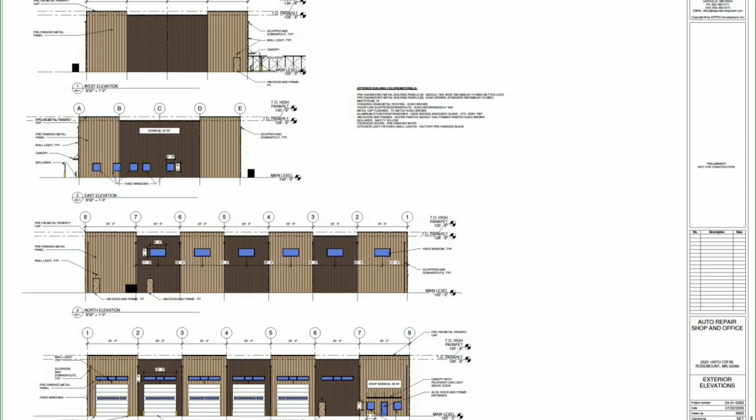So for site lighting, they provided a lighting plan containing pole-mounted lights at 25 feet tall and wall-mounted lights at 19 feet. The maximum height is 30 feet, so they're both good there. And the applicant's photometric study shows compliance with the code standard.

So there are two options in front of the Planning Commission tonight: an approval with conditions, or the option to continue the item to the Planning Commission meeting on August 25th. I believe the applicant is here and I can also answer questions.

Are there any questions from commissioners? I got one. So the entry, was it previously on the previous site plan, was the entry always not on the cul-de-sac area? Yeah, so I believe the previous plan had an entrance on this side up in the cul-de-sac, but just because they are only using these two sites, it's going to be on that shared driveway. Commissioner Biedner, were you asking about access into the site or an entrance into the building? Into the site, yep.

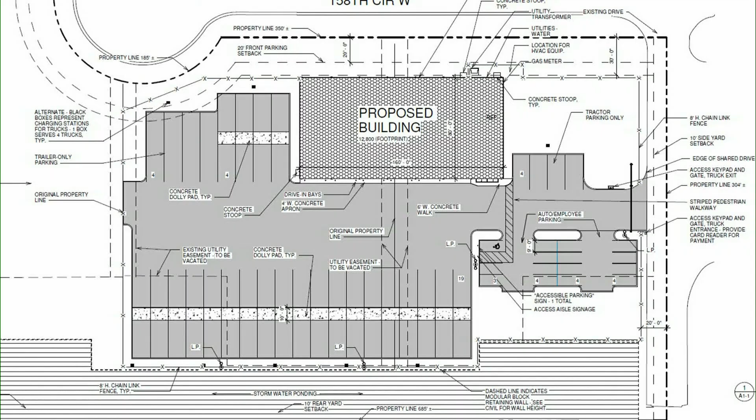Liz, a couple questions. Because I know one of the options here was to continue because there are some missing elements. The landscape plan was not complete. Was the exterior elevations, is that complete from your perspective? Since the standards were updated in the 2024 zoning code, we are including the condition of approval that 40% of the materials be made up of that approved list.

Okay, and then the trash enclosure, I can ask the applicant about that one, right? Because that hasn't been planned out yet. Correct. Okay. Are there any more questions from the commissioners?

Otherwise, all right, at this time then, we'll open up the public hearing. And if we can ask the applicant to come up first, that'd be great.

Hello, I'm Nadia Ritter with APPRO Development. We're representing Kamal and Mustafa's KCI group, who are the owners for this project.

So for the landscape plan, to get that question out of the way, we plan to add around the current parking areas for the time being, ideally where we can put them in a way that they won't have to be removed once we do the future expansion. So spots that would be a future island and kind of around the auto parking areas in that sense.

Can we bring up that layout that shows the current landscape plan? Thanks, Liz.

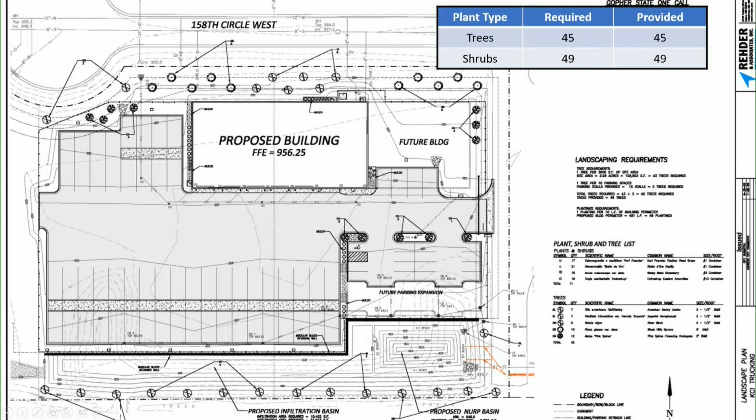Thank you. Yep, for the second one with the exterior elevations, all of the dark brown panels that we were showing, those will be changed to be an approved material from the list. That does meet the 40% at minimum. It gets to 41% on the most restrictive elevation. At most, it gets to be about 48%. So we would have that.

With that, we would like to request that we could go back to the initial exterior elevations that were submitted for this application that showed a gabled roof line. As it's currently shown with the metal panels, adding whether it's brick or stone, masonry of some form along those spots, it will create a weather challenge that could cause issues in the future for the metal building. I believe the previous application that was approved back in 2025 did also have that gabled roof. So we would just request that we could go back to that to include the 40% there, just to make sure there's no future issues for the owners with weather.

Now would the plan be to update those plans prior to the commission, I'm sorry, the council meeting for that approval? Yes, sir. Okay. Mr. Chair, so because this is a site plan, it is approved solely by the planning commission. Okay. All right, thank you.

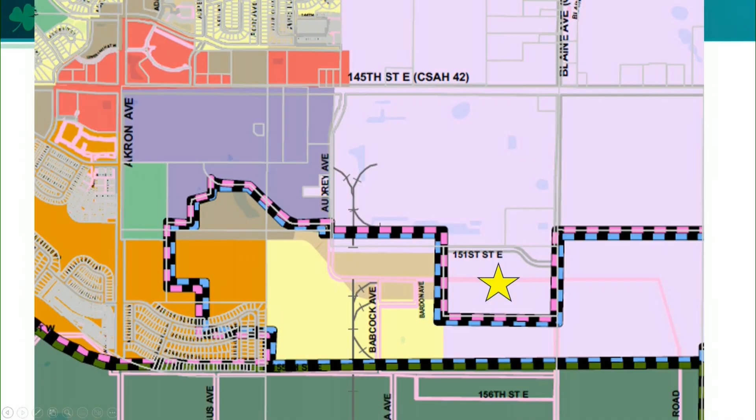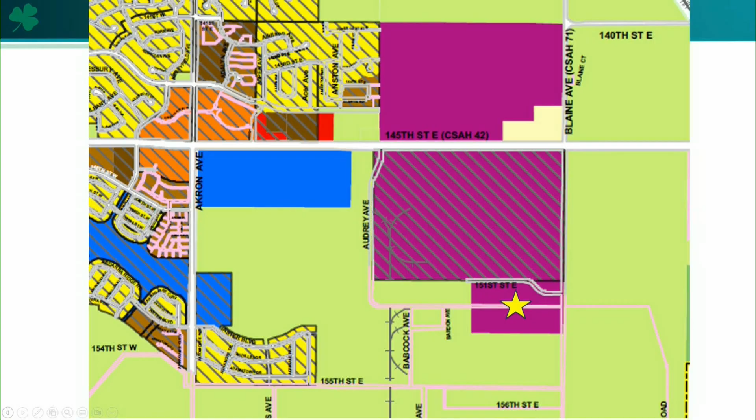There will be a new street constructed as part of this along the northern side of the project. You can see here the site's land use designation as business park, that lavender color there, and the site itself, its location is indicated with that star. Then the zoning for the site, B2 employment, that's that purplish color there. Again, the star indicating the site itself, and the general alignment of that future road on the north side there.

So this is the overall concept plan. This is what the applicant is envisioning for the full build out. Before the Planning Commission tonight is just the first phase, which is in this kind of northeastern portion of the site. I've got more detailed plans here going forward, but just want to give the Planning Commission an idea of what they can expect this project to be built out as.

So in addition to building 1 and 2, which are the principal testing facilities in there, there is accessory buildings and then mechanical buildings as well that support the work that goes on in those principal buildings 1 and 2. There's some mechanical equipment shown here on the south, as well as other accessory buildings.

These are all concepts. Ultimately, whatever does come forward in subsequent phases beyond phase 1 will come back to the Planning Commission for review through the site plan review process. Also note that Xcel Energy will be constructing a substation in the northeast portion of the site. That's similar to what the Meta site has over there, making use of those transmission lines that are being run down there. A separate site plan review for that essential service facility would be required prior to its construction.

Lastly, I want to note the engineering building in the central area. This would be a collaborative effort between the University of Minnesota and Northwind to allow for educational opportunities on that site as part of research and testing. The applicant is envisioning a campus-style development with buildings 1 and 2 and the engineering building sharing a similar architectural feel, with a complementary mix of materials and a central plaza area—what you would picture for a tech campus in that area.

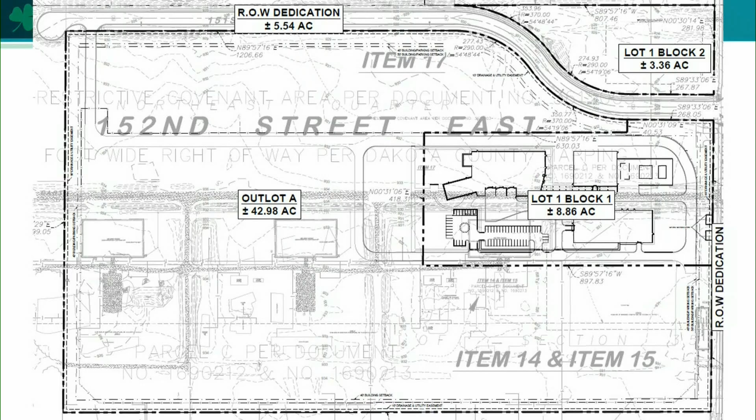So this is the preliminary plat, giving a general layout of the site showing the right-of-way as well as the lot areas. The actual plat itself shows the parcels that would be created: Lot 1, Block 1, and Lot 1, Block 2 are the 2 buildable lots. Outlot A would be reserved for future phases, and the boundaries of future parcels would be reviewed and approved through the platting process going forward. Again, 151st Street is shown there as future right-of-way.

So with regards to the Planned Unit Development Master Development Plan, I'll go through the requested deviations or flexibility from the code. In speaking with the applicant, they indicated that the second phase would be very similar to the first phase with regards to building height and materials.

They are requesting maximum building height of up to 120 feet, with occupiable building height not exceeding 75 feet. The 120 feet would be more for mechanical exhaust towers from the building, and I can certainly defer to the applicant on their specific requests for these.

For off-street parking requirements, the applicant is asking that parking be based on the actual employment and usage of the site due to the highly specialized nature of the development. I want to point out on this concept plan that the applicant is anticipating additional parking in some of these subsequent phases. Typically we require parking standards because someone might buy a building built with a certain level of parking, and then someone else comes in with a different use that has a much higher need for parking.

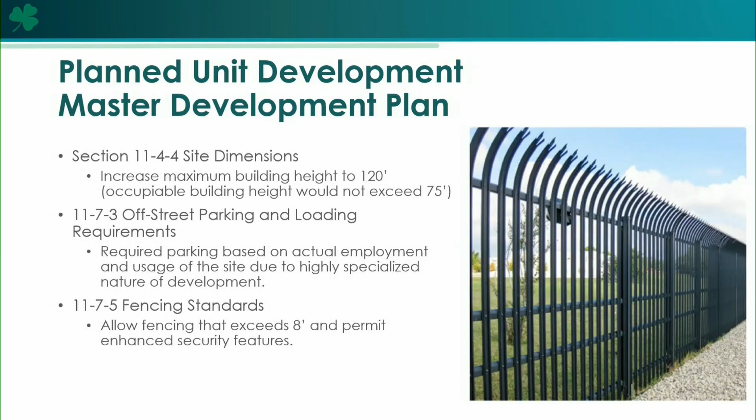The third item being asked for deviation from the code is regarding fencing standards. This is similar to what Meta had requested for security fencing, exceeding 8 feet with some enhanced security features. From an aesthetic or visual standpoint, from the right-of-way, the fencing would be located behind any screening trees, so impacts on adjacent properties are pretty minimal in that regard. Staff is supportive of that, understanding the unique security requirements of this project.

Landscaping, screening, and buffering standards. The applicant's plans show a significant use of coniferous trees that exceed 50%, which is what the code allows for screening. Staff is supportive of that. Any other trees in the boulevards along new 151st Street are deciduous. There's a mix of deciduous and ornamental trees throughout the site. It's just the heavy plantings along the perimeter result in a percentage of coniferous that exceeds that 50%.

The next item relates to lighting standards. The applicant has expressed concern that they may exceed 1 lumen at their property line. Staff would note that the maximum level of illumination is measured at adjacent property lines. So when there's a right-of-way separating two properties, it might be 1 or 1.2 lumens on the subject property line, but once you get past that right-of-way, it's down below that. Staff is supportive of the request and would work with the applicant to verify what that illumination level would actually be on the other side of the road. The lighting is located along the roadways and the property itself.

Architectural standards: flexibility in the massing and articulation requirements based on the shape of the building and materials used. Typically this is a requirement where if there's a length of wall greater than 100 feet, vertical elements are required to break up that wall, either different textures of tilt-up panels, different colors, things like that. The applicant's plans and the shapes of the buildings show materials being used that would create visual interest and break up the mass of the building. They're just pretty large structures. Again, the screening provided and required by the applicant minimizes any impacts that a deviation from that standard would create. So staff is supportive of that as well.

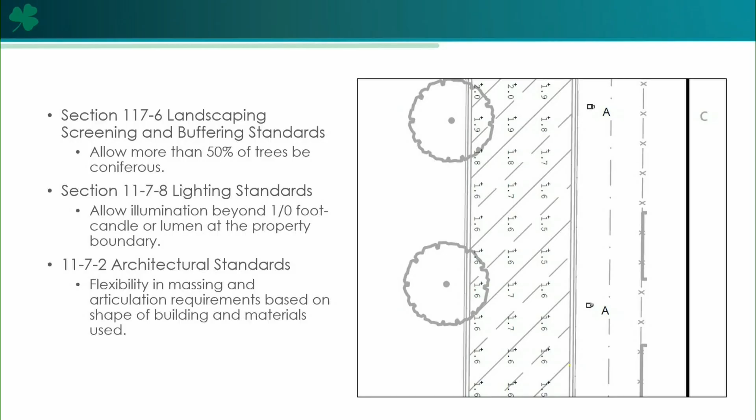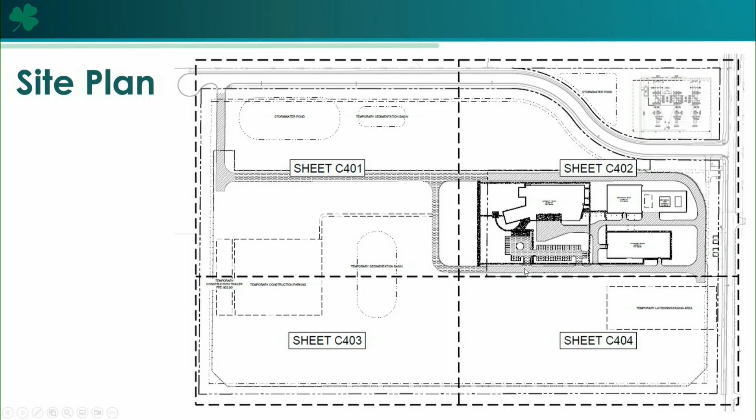Zooming in a little bit here, you can see there are 3 primary structures shown in this first phase. Building 1, where the wind tunnel is located, also has office and support space in there. A mechanical building supports the work that happens in this principal structure. There's a mechanical yard here, fully screened by walls that match the mechanical building. And then an accessory building that also supports the work going on there. They are connected by overhead piping connecting these buildings as well.

Parking for the site would be in this southwest portion here, and this is how employees would be entering the building. I have detailed architectural plans as well as 3D renderings of that primary building as well.

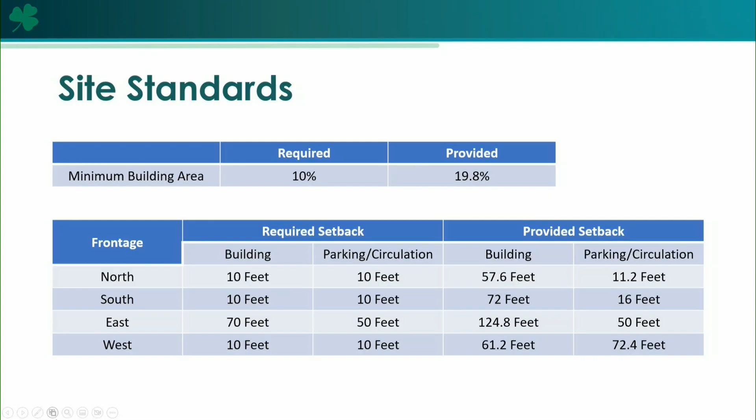The parking - the applicant did provide an expectation of what would be needed on the site. They anticipate 40 spaces needed, and they're showing 55 spaces there. Again, it's not likely that the user of the site would ever change, or the use itself would ever change. There is additional land for additional parking if needed that the applicant could make use of.

With regards to the exterior materials, the buildings shown in this first phase have a maximum height of 70 feet at the exhaust tower and 40 feet elsewhere. These are within the parameters of the applicant's PUD request of 120 feet for structures like the exhaust tower.

The standard in the B2 zoning district is 50 feet, so the bulk of the buildings are well within that standard.

The mix of materials is of a higher level than what we've seen in other B2 employment district projects. Glass with perforated screening fins will be used around the office areas. Precast concrete with vertical fins and reveals, as well as translucent paneling, create visual interest and allow light to enter the building in areas that are not office space. There's also a mechanical yard fully screened by walls of the same materials as the principal structure.

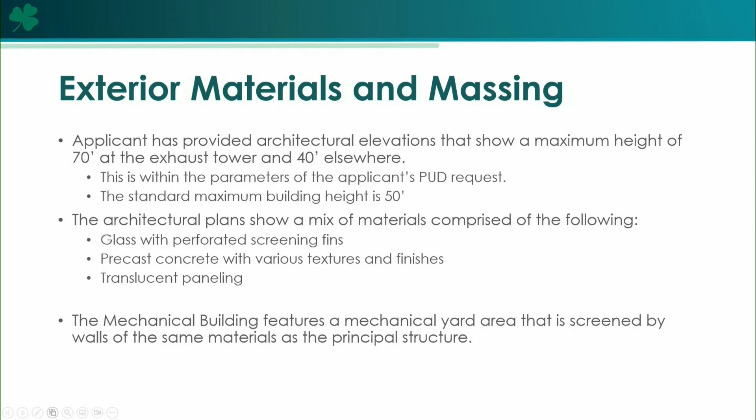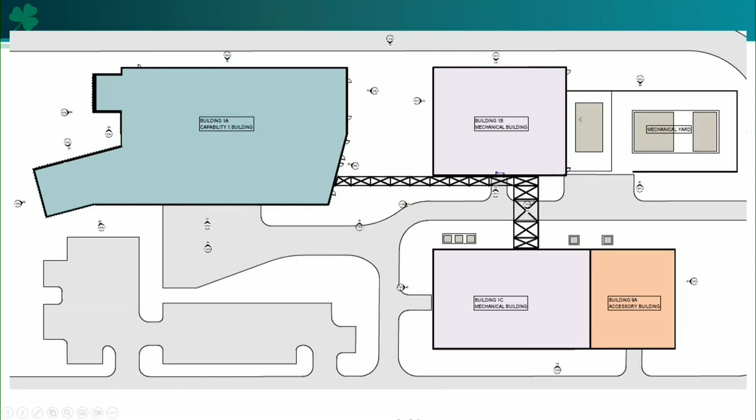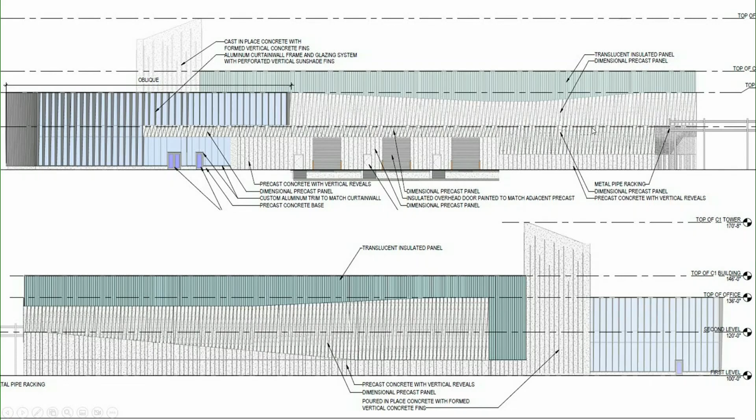This is the elevations of main building 1. You can see this vertical exhaust tower, aluminum curtain wall frame and glazing. These windows have fins to help create shading so it doesn't cook the occupants with all the glass, and the upper area is translucent paneling. Here are precast panels with vertical fins as well.

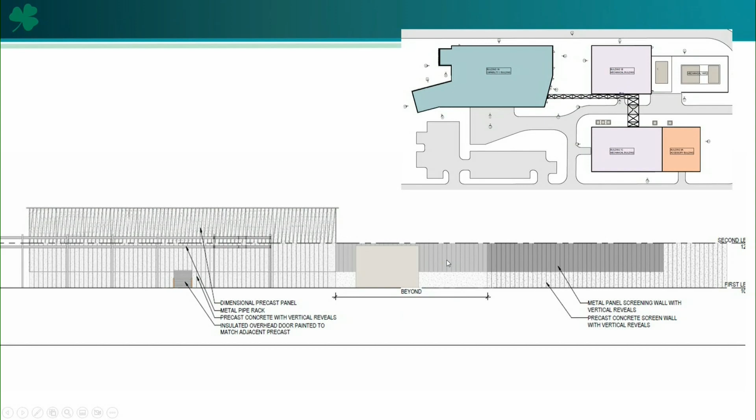Regarding the other buildings, this is the northeast structure, the mechanical building, and then the yard area with the screening wall featuring the same kind of vertical reveals, precast concrete. This is the southern building with some translucent panels as well.

From the road, you wouldn't really see this because of all the trees being planted over there, but this is just the view from the east. The campus itself is focused on that central plaza area, and that's where you'd see the glass office space from.

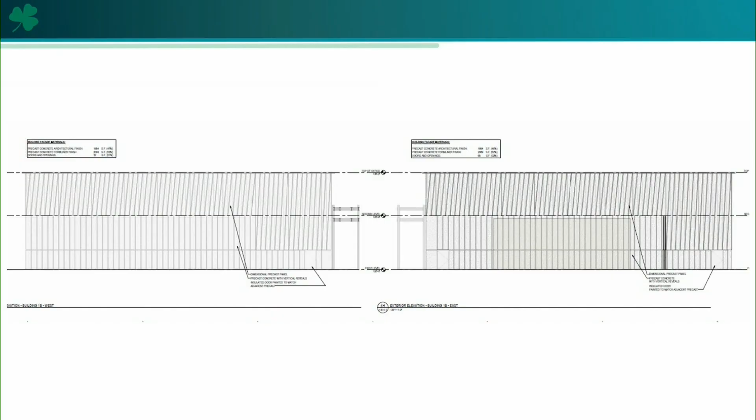Just another image here of that building. This one is the mechanical building again.

With regards to landscaping, the applicant has provided a landscaping plan that includes landscaping around the future substation, as well as landscaping along 151st Street. Based on a ratio of 1 tree per 3,000 square feet, 129 trees would be required, and 178 are provided.

Within the parking lot, 17% is landscaped and it has 10 trees; 5 would be required based on the number of stalls. One foot of foundation planting per 10 linear feet of building perimeter is required, meaning 254 is the requirement, and they've got 362.

There were trees on the site that were removed, 158 inches, or 17% of the total, meaning 158 would need to be planted based on the size of this site in relation to the overall site. As phasing goes forward, this would still be brought forward based on each individual phasing area. The applicant has 482.5 caliper inches as part of this phase to take up some of that total and get ahead, so we aren't waiting at the end of the project to see how many more trees need to be planted.

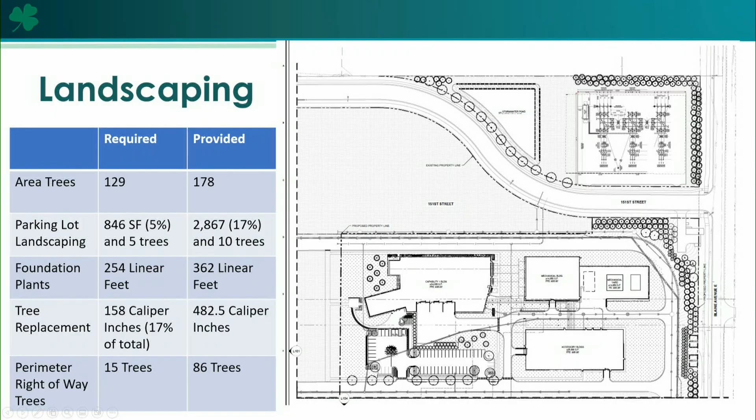This is a close-up on the parking lot and building 1 primary area. You can see foundation plantings around it in the parking lot landscaping and around the entrances.

This shows that mix of trees along the perimeter, with the makeup being primarily coniferous. There are some deciduous ones mixed in, they're not all coniferous trees, but that does create that greater than 50% threshold.

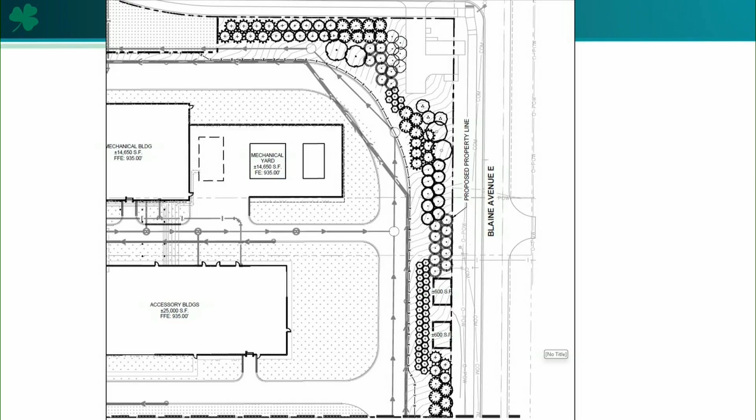New utilities will be installed in 151st Street East, pulled from Blaine Avenue, and those connections will be made to the site from there.

The fee in lieu of parkland dedication was already paid with the original subdivision, and on the plans provided by the applicant, sidewalks and trails are shown along those rights of way in accordance with the requirements of the code.

As I said, there is a site lighting conversation to continue with the applicant, but all the lighting is shown on 30-foot pole mounts, which is within the maximum allowed by the code. Staff feels confident that the actual number of lumens at the adjacent property boundaries will be much lower than what it is at the subject property's boundaries, but the applicant has requested flexibility in that standard.

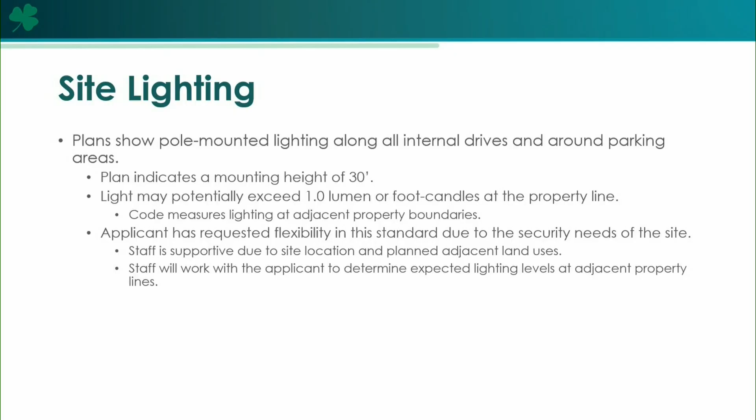With regards to the site, this is the first site that the University of Minnesota is selling that does require, or did require, some environmental remediation. The first 2 parcels sold by the university, for Amber Fields and for Meta, were identified for sale initially because they did not contain any contamination that exceeded the levels for residential development, which is the highest threshold here.

Cleanup has already occurred on site, and it was mostly asbestos removal. So the Planning Commission can see what is going on out there—it may be familiar to some of you—the yellow dots are areas where contamination was below that residential threshold, and the red dots are where it exceeded that.

So the zoom-in inset here shows the area that needed remediation, which has already been done.

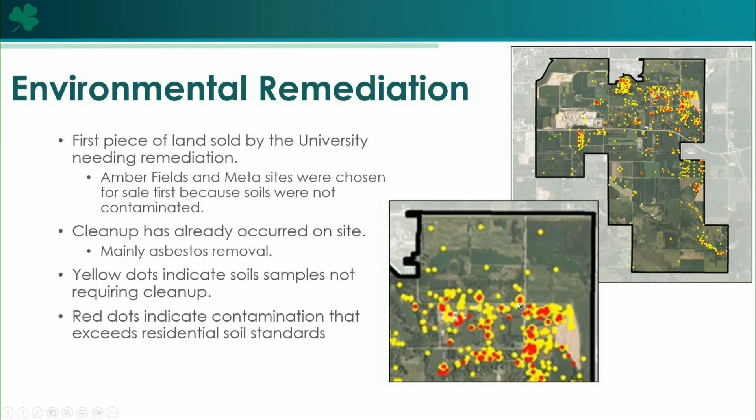Because this is an interesting use that the city hasn't seen before, a noise analysis of the design was completed and provided as part of the applicant's submittal materials. The analysis of the potential noise is based on the design of the proposed project, and it's using the limits set by the MPCA as a basis for its analysis.

The project is designed with noise limits that are set by the MPCA for nighttime levels, which are lower than daytime levels. The analysis does show that the noise generated will fall within the limits well before it reaches residential properties nearby.

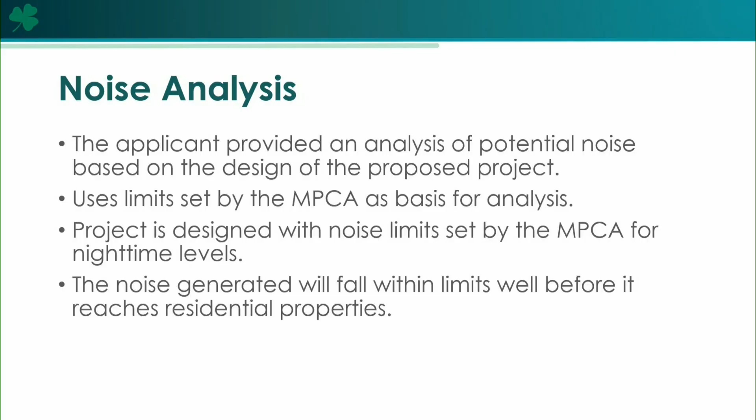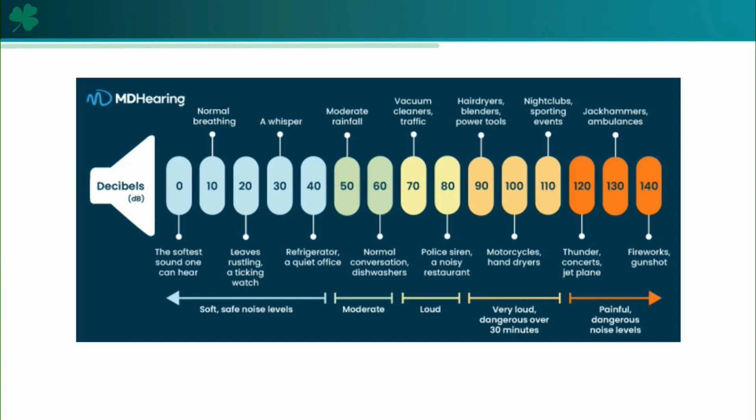Just to provide context on what noise means, we'd be mostly considering things between 40 and 50, or the low 50s, which would be like a refrigerator or a quiet office, or moderate rainfall. A vacuum cleaner is 70 decibels. Just to give a level set on what different levels of noise might be.

Also for context, on the surrounding area, measured from the property boundary, it's 3,250 feet to the nearest adjacent residential property. DCTC also falls into that category as a use, and that's also 3,250 feet from this property boundary. But when measuring the anticipated noise levels for the design, we'll be looking at the actual site here.

So for that first phase of development, you can see as you get further from the source, the level of noise drops. If you were 10 feet away from the noise source, it would be pretty loud, at 90. But by the time you get to 3,000 feet away, where the nearest house is, you're well below that residential decibel maximum set by the MPCA.

Again, 45 is kind of a quiet office or a refrigerator in your home, and the noise level is below that even before it gets to the nearest home there.

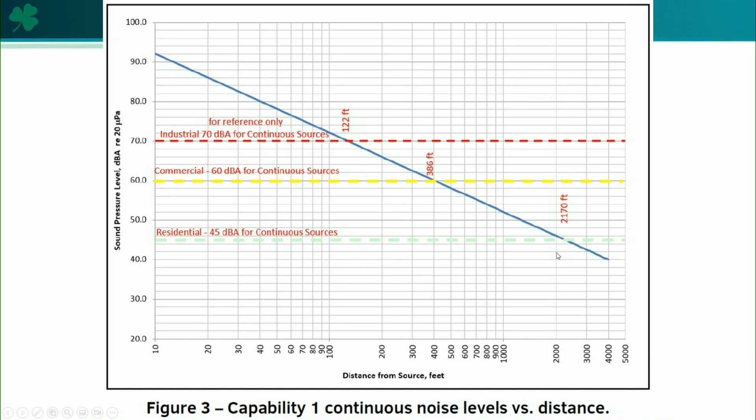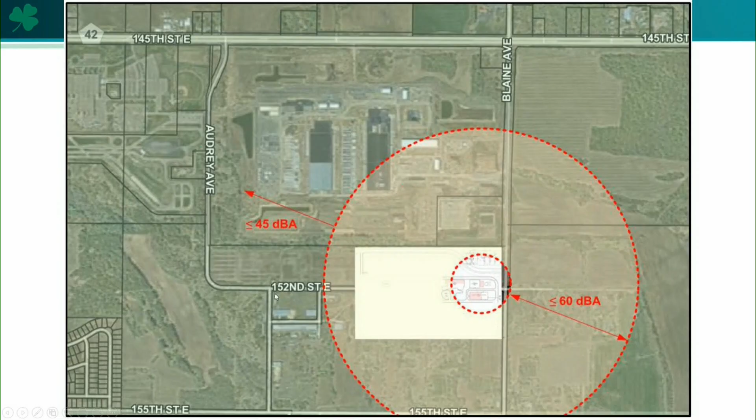So what that means is once it reaches this point, it's within the threshold allowed by the MPCA. And conservatively, you could guess that it's much lower as you get further out.

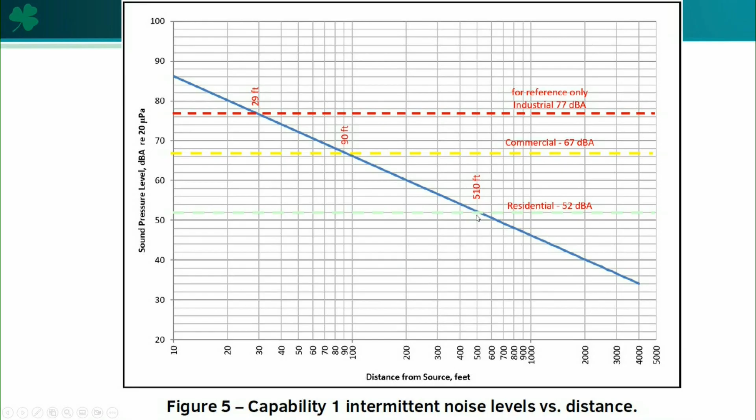With regards to the intermittent noise, expected to last up to 4 minutes at a time while testing is occurring, that standard is a little different. Because it's intermittent, it can be a little louder, but once you get to 3,000 feet where the nearest house is, it's much lower than what the MPCA allows and much lower than what rainfall would be. This is where that threshold is met.

So with that, I can take any questions. There are 3 recommended motions before the Planning Commission today. The applicant is here and can elaborate or respond to any questions the Commission might have that staff is unable to answer.

Thank you, Anthony. I'll start off with a couple questions. The noise is within standards. Do we have a forecast of what the decibel level will be once the additional phases are completed and additive with the Meta facility?

So when you're measuring decibels, you don't just add two things together and get double that. If a vacuum is 80 decibels, if you have two vacuums, you're not getting 160 decibels, because that would be like a jet taking off. The standard is that when you double a source of roughly the same level of noise generation, you add 3 decibels to that. So the applicant's analysis, the report they submitted, was taking into account the first two phases. That's where that 52 comes into play versus 55, because they subtracted 3 from what the limit would be, since it does add that 3 decibels to the noise, or reduces what the limit would be.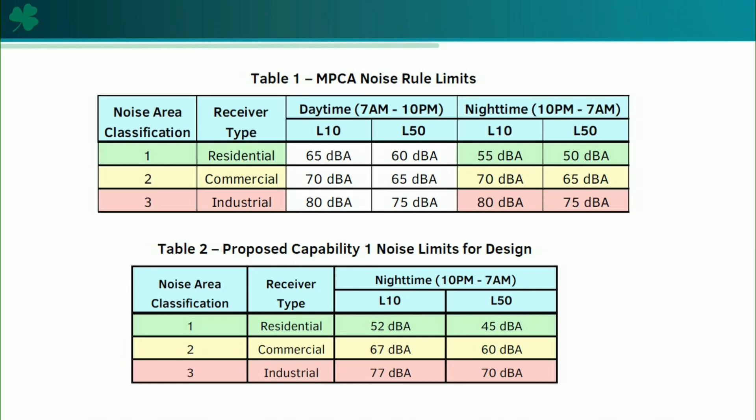And the reality is, in Rosemount, especially in that part of the city, most of the noise is coming from County Road 42, just from engines accelerating, trucks slowing down, things like that. There's always a level of background noise in urban environments in that regard.

Now, moving on from noise, but big picture, really, the location for this is somewhat secluded, right? We're not expecting regular traffic. I think there's a dirt road going south, but it's not a regular thoroughfare for residents, right? So it's really going to have low traffic around this facility.

So at this time, Blaine Avenue is a city road. It will become a county road, and it'll probably be a connection between the two. There will likely, in the future—I couldn't speak to when that would be—have more traffic, but it would be a county road and regulated by the county in that regard.

Okay, great. But there is some heavy landscaping right on Blaine. That's where the heaviest landscaping is. Correct, that's what the landscape plan shows. And as the future phases come through, I think it would be safe to say that there will be additional landscaping around the perimeter as each phase comes in.

Any other questions from commissioners? Yeah, I have a couple questions. We showed the maximum distances to the different DCTC and those residential areas. Are there any other potential developments that could get closer to there, that could then start to shrink down that 3,250 distance and potentially start to get those decibel levels where they start to creep up?

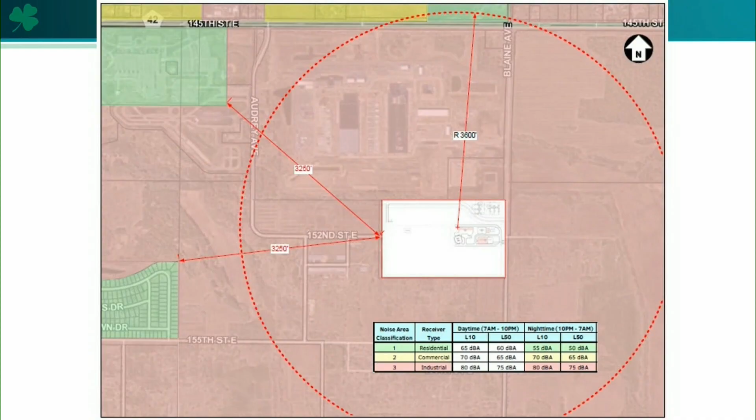Okay. And then I'm curious what the rationale is on condition B, where we're potentially asking for a deviation to allow structures up to 120 feet when the structure is shown to be about 70 feet tall.

I would defer to the applicant on that one. The reality is they're probably seeking flexibility, so they're not coming back every time to ask for a deviation, saying, oh, we want a maximum height of 70 feet here, and then the next phase comes through and they're like, oh, we need it 85 feet for this one because the design is a little different, or we want to test different things in a different way. So I would defer to the applicant, but because it's a flexibility issue, I'm assuming that's why—they can certainly speak to that better than I can.

Just real quick, I was thinking about this earlier—I'm not sure if this is a good comparison, but Proto Labs has a pretty tall stack, which I believe is closer to 100 feet or so. Do you happen to know what that is for reference? I can't remember off the top of my head. I know Acona also has a pretty tall stack they built to enclose some equipment out there, but I don't know what that height is. I'd say based on the fact that it's a half mile from County Road 42, the impacts of the building height are pretty low on the community in general. But it does go back to Commissioner Bugai's point about how close housing could be expected to be within that area. They would be limited to whatever gets approved through here, and I'd see what the applicant has to say about that.

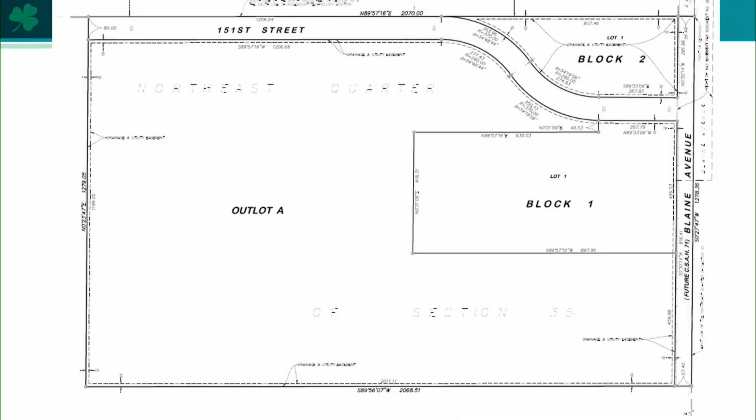I would defer to the applicant for confirmation, but my understanding is that they would be installing fence along the entire site to begin, or around here, and not up over the engineering building. But the applicant can certainly answer that question. It would be going at least around the bulk of the lower part of the site.

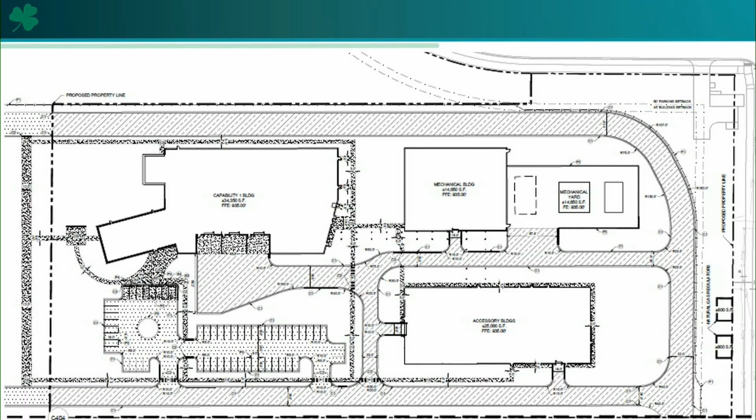Any other questions? All right, so this is a public hearing, and so we'll open that up. I'd like to invite the applicant up first.

Thank you, Mr. Chair and Commissioners. I appreciate the opportunity to speak with you today. My name is Justin Pearson, the Director of Programs at Northwind Test. We are a small company located in St. Paul. We've been around for quite a while, about 70 years, but we have just now started to revamp the company to take on programs like this with pretty significant impact to the community and to the country.

So I heard a bunch of questions. That's very good that we get to answer those. We've been making wind tunnels for a very long time, and we have a significant amount of experience in doing so.

This particular site for us represents a very large opportunity, not only for our company, but also for the community. At the end of our production, with all of the phases complete, we expect to be hiring close to 200 people in pretty high capacity jobs in a high technology area.

In addition to that, during construction we anticipate anywhere from 3,000 plus trade workers on site during the construction of the facility. So it's a very significant opportunity for us and for the community. We're excited to be able to do that with you.

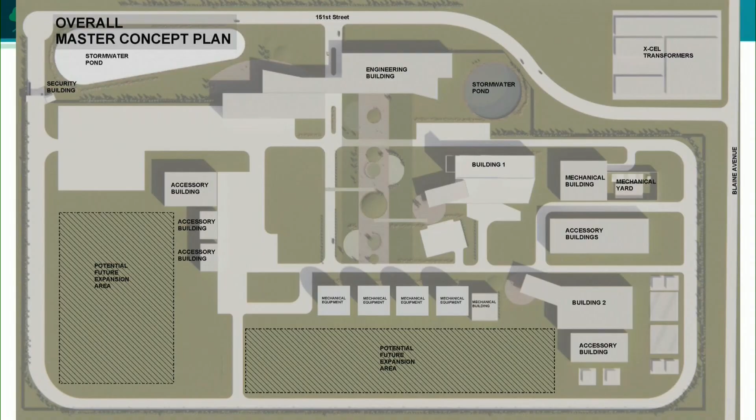What is your anticipated timing for the engineering building? We're expecting the engineering building within the next four years.

Other questions from the commissioners? All right, thank you.

Are there any other comments or questions from the audience? Please come on up, state your name and address.

My name is Kathy Pritchard, I live at 15703 Crystal Path in Rosemount. I wanted to reach out to the commissioners about one thing. When reading through the plan, I was a little confused about the variances, like the site lighting, where it might go over the lumens for the zoning and they want flexibility. I didn't see any reasons why they would need it higher, so I just want to ask questions about that flexibility. I think the plan is actually beautiful. I'd just like to have reasons why, because if it made sense for the development to have higher lumens in the lighting or a higher building, I'd be all for that, but they don't say, and that's what I'm not understanding. Thank you.

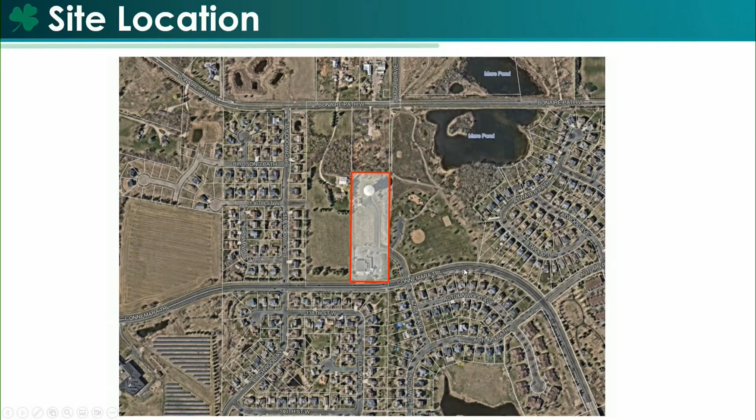A review of the site plan. The existing fire station and associated parking areas are located on the southern portion of the site off of Connemara Trail. The northern portion contains the water tower and is directly west of Meadows Park. The surrounding properties to the north, south, and west are developed residential uses around the existing site. The proposed site plan includes additions to the east and west sides, and also the southern portion on the east side of the existing fire station.

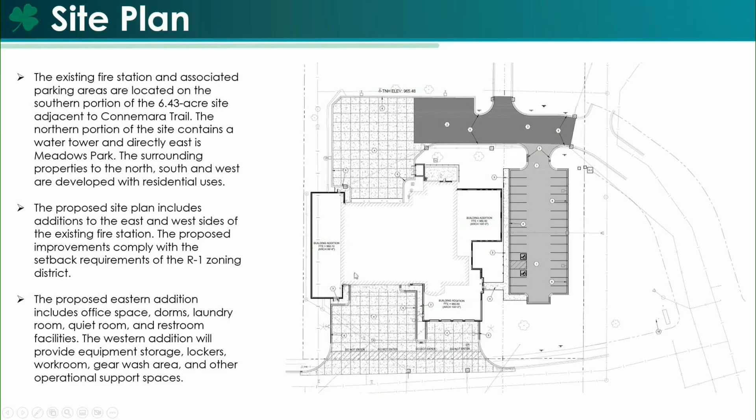The proposed improvements do comply with the setback requirements of the R1 zoning district, which this property is located within. The proposed eastern addition includes office space, dorms, laundry room, quiet room, and restroom facilities. The western portion houses more equipment storage, lockers, workrooms, gear wash area, and other operational support spaces. The southern area will be expanded to provide more space for the fire trucks, as well as additional garage area expanded in that southern part.

A little overview of the parking and access on the site. The site is accessed both from Azalea Avenue and Connemara Trail. Azalea Avenue runs along the eastern boundary and is the main access to the site, also giving access to the water tower on the northern part and to Meadows Park to the east. Azalea Avenue serves the two parking areas on site, one directly north of the station and the other directly east of the existing building; these parking areas are to remain unchanged, with no additional parking proposed. Access from Connemara is primarily intended for fire access to the stations and garage areas where the fire trucks will be housed, an area to be expanded to accommodate the garage expansion.

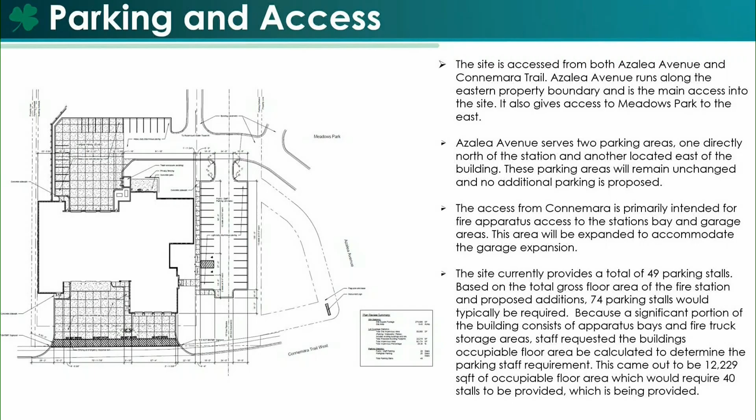The site currently provides 49 parking stalls. Based on the total gross floor area, though, with the fire station and proposed additions, there would be 74 parking stalls required on site per the ratio outlined in city code. But because a significant portion of the building consists of fire truck storage and apparatus space, staff requested that the occupable floor area be calculated to determine the parking requirement, which came out to about 40 stalls. Since the site provides 49, staff sees that as sufficient given the area being used throughout the existing building.

A little overview on landscaping. The applicant submitted a landscape plan identifying locations of existing trees, trees that need to be removed, and proposed new tree plantings. It also identifies new foundation plantings around the existing building and parking area, stormwater basin seeding, and lawn restoration areas throughout the plan.

The landscape plan shows about 14 existing trees will be removed. Seven of the trees are located on city-owned property directly east, adjacent to Azalea Avenue, to accommodate stormwater improvements in that area. The remaining trees removed are primarily located in the southern portion for the garage and concrete expansion. The plans show 10 existing trees will be preserved, and 11 new trees will be planted throughout the site.

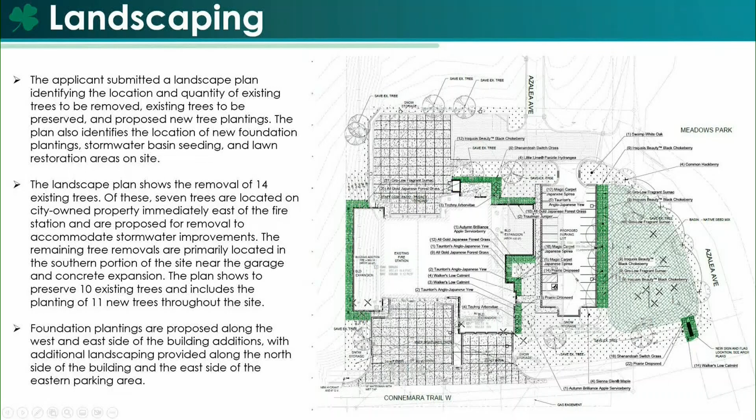Foundation plantings will be proposed along the western addition on the western side of the site, as well as along the northern and southern portion of the east expansion, and also along the eastern parking area.

A photometric plan was also submitted by the applicant. The site currently has existing wall-mounted and pole-mounted lighting, much of which will remain, with additional lighting proposed on the additions and on the southern portion of the site accommodating the garage expansion. The photometric plan demonstrated the proposed levels comply with city code standards.

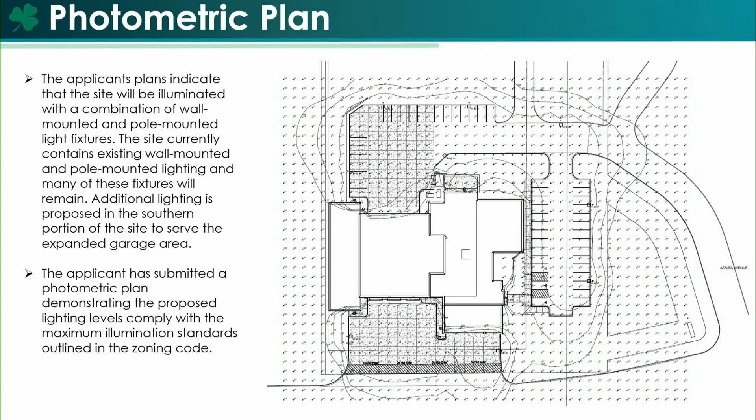A little overview of the architectural elevations: the existing fire station construction is a combination of brick, CMUs, and cast stone accent bands. The proposed remodel and building additions will retain these existing materials while incorporating additional exterior finishes, including pre-finished composite wall panels, aluminum storefront glazing systems, and aluminum screening on top to help screen mechanical equipment on the roof.

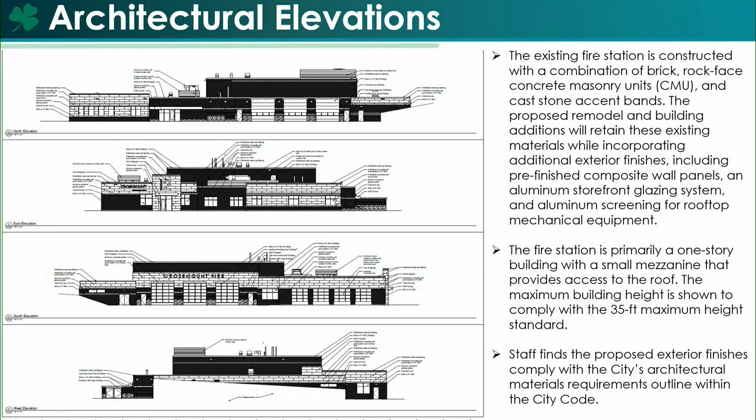The fire station is primarily a one-story building with a small mezzanine providing access to the roof, and it meets the maximum height requirement. It's about 25 feet in height, while the max within the R1 zoning district is 35 feet, so it meets that standard. Staff also finds the exterior finishes comply with architectural material requirements outlined in city code. Here's an overview of the floor plan as well.

The western expansion will house more of the operational additions needed by the Rosemount Fire Department. The eastern portion will hold dormitories, quiet rooms, additional full-time fire staff office space, and a lunchroom—additions needed with the expansion of the Rosemount Fire Department.

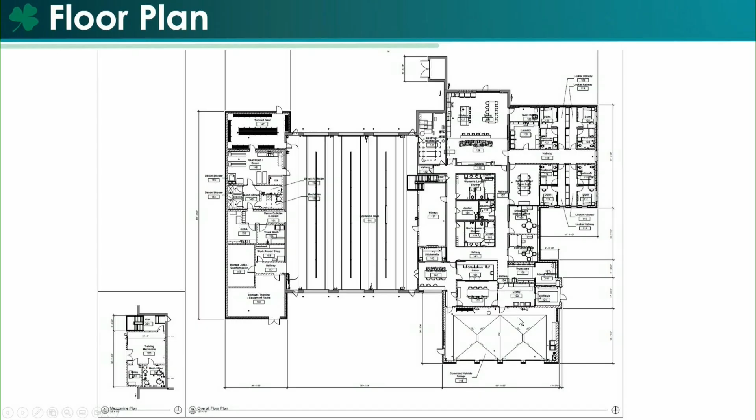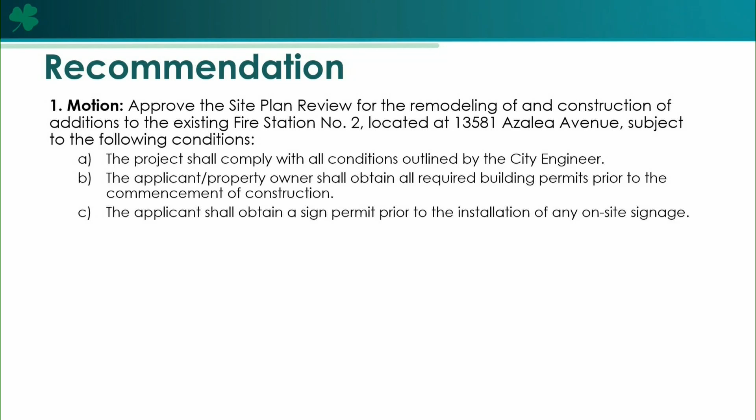There is one motion in front of the Planning Commission today, which is to approve the site plan review for the remodeling and construction of additions to the existing Fire Station 2, located at 13581 Azalea Avenue, subject to conditions A through C. I can take any questions the commission may have, and I know a representative with the Rosemount Fire Department is here, as well as the consultant.

Thank you, Julia. Any questions from commissioners?

I just have one question. So this is a remodel of Station 2. I know we have Station 1. I think a lot of people are interested, as we build further east, is there going to be a Station 3? And at what threshold, population or response time, would we need a Station 3?

I'll let our fire chief, Kip Springer, speak on that since he's in the audience, and I'm sure he would love to elaborate. Thank you. Yeah.

Any other questions? No. All right, so this is a public hearing. We'll go ahead and open up the public hearing. Kip, if you'd like to step up, please.

I think most of us know you, but it'd be good to say who you are. Yeah, my name is Kip Springer, and I'm the fire chief here for Rosemount Fire.

To answer your question specifically, we did a staffing study earlier this year to identify, as we continue to grow as a department, what our needs would be. A couple of those first steps included additional full-time staff and remodeling of a fire station to begin our 24/7 staff model. Future steps will include remodeling Station 1, and there was a metric built into the system about population growth to the east, and at a certain point building a third fire station, tied mostly to population growth and density, but also helping with response times.